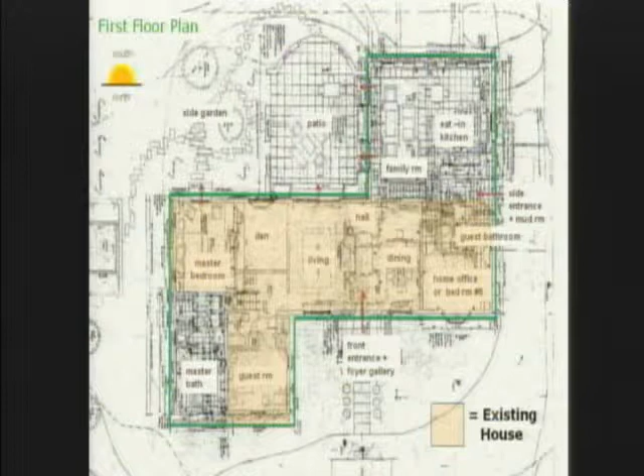When it comes to the floor plan, the tan area is the existing, and then the bump outs to fill the corner for the master bath, and then the larger family room and eat-in kitchen are on the back side, facing south, right? That was an interesting consideration, to say the least. When it comes to upstairs, it's a cape, basically. So you have bedrooms and bathrooms and lofts and offices for the home use all throughout the property. And we'll take a look through the back.

Even using the old flagstone from the existing patio, instead of letting the cracked and chipped ones go to waste, buying the diamond bit blade and chopping them up to use as stepping stones. Everything was about salvage and reuse as well as high-tech efficiency.

Inside, what you end up having is an open floor plan with the family room and the kitchen, and it's really about meeting some of the needs from the client that happened to be my wife to make it something that was also party-friendly. This is the house when the Obama team asked to host the Clean Tech for Obama fundraiser back in October. I said, sure, and it turns out about 6 months later on Earth Day, I had the invitation to teach his daughter and then her second grade class the conservation program for the school. So it's nice when the administration gets on board with generally the trends that seem to make a lot of sense.

Inside, again, you wouldn't necessarily see that this was a radiant floor system, but the idea of thermal mass and having 1.25 inches of gypcrete below the tile means there's about 14,000 pounds of masonry in this house, and it holds the heat. So even when the sun goes down in the winter, now there's an opportunity, not unlike the way a sponge holds water, to start to release that heat back out. All those things start to combine with the zero VOC paint, the Energy Star appliances, the low-flow faucets, collectively aggregating all those savings.

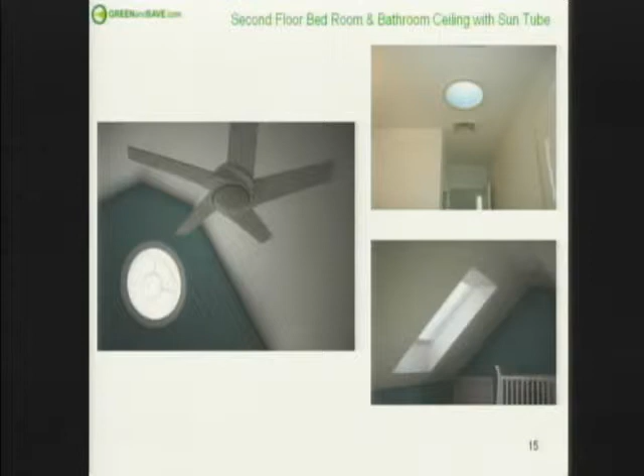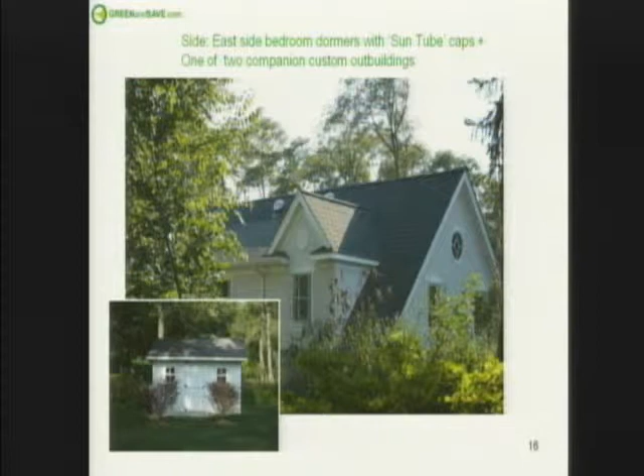When it comes to sun tunnels and skylights and 5-speed reversible ceiling fans, we really went to every length to think of what could be done to create efficiencies. Those little sort of domes on the side of the house, they're actually the caps to the sun tunnels. If anyone's interested, we have at Green and Save all the data about the payback and the performance. But for a few $100s, you basically get light for the next 5 decades. And it's one of those things where if the room is right, it really makes sense to look for things that maybe we didn't grow up with in our own houses.

Inside, from the crazy wallpaper to the shot on the right with the light coming through the door, even translucent panels, inset and doors, provide an opportunity to share light, which means you can walk into rooms and you don't necessarily always have to turn the lights on. It's not unlike the spirit of those sun tunnels.

When it comes to the bathroom, even having the floor run with the radiant heat in the shower, so with various thermostatic temperature gauges that speak to the basement solar tank, we're now priming the shower, and it's warm on the floor in the morning at about 6:45.

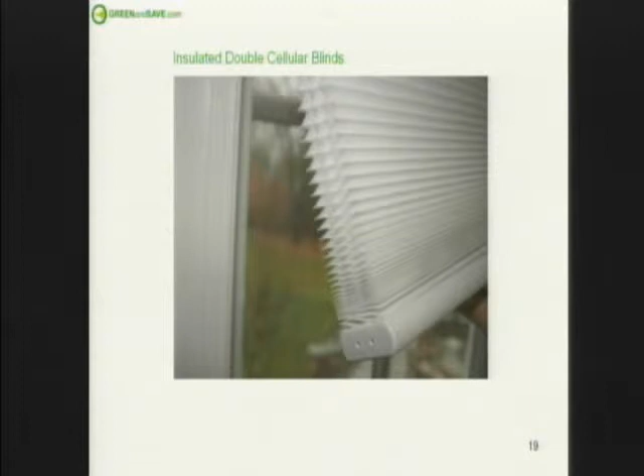Insulated double cellular blinds, the low tech that seems pretty obvious. Well, the air is trapped inside those cavities versus just a mini blind. The opposite would be a higher cost when you come to a curtain system instead of a rod, which lets the air circulate behind it. Now by running a cap on the top and letting the drapes touch the floor when they're closed, all of a sudden we're getting some incredible thermal advantage, and we found a NASA-like fiber that basically traps air, which is stitched inside those curtains. Well, knowing where you live in the house is pretty interesting. We shut those curtains in the summer during the day, but in the winter, since it's on the south side, we will leave them open.

So the way it works, we're going to start opening certain things and closing them based on where we are on the planet. I always joke with my 4-year-old, because he has a compass, that a tool like this, as simple as it is, is so incredibly important. I've seen realtors that might talk about a sunroom in a house, but in fact it's on like the northwest corner. They're not getting a lot of sun.

So when we do home efficiency checkups and we do a lot of the reporting, coaching homeowners into how to operate their home as an organism, not just an object, is part of the rhythm of our methodology. Even a stair, it's basically ACL Industries up in Stamford, Connecticut that built it. They built the USS Roosevelt. It's made from about 600 cases of recycled aluminum beer cans. Everything that we did down to the sisal rug and the bamboo floor was about looking at sustainability as well as energy.

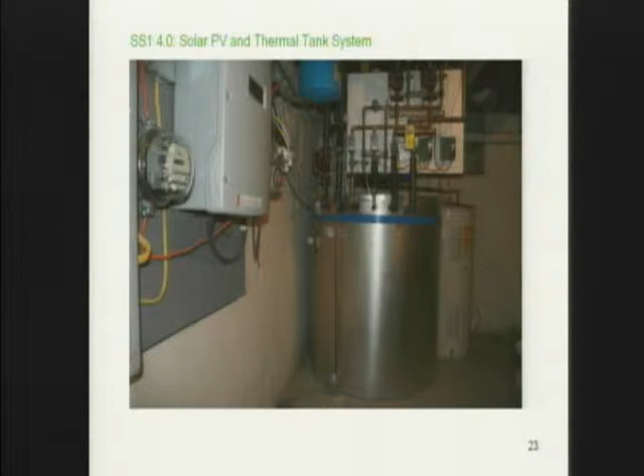This actually was featured on the cover of Inventor's Digest magazine, not to be confused with Investor's Digest, which has slightly more readers. But that was a nice, I think, moment in family history to at least get to that level.

When it comes to questions, we find that people always ask about the payback. You know, when am I going to get my money back from all these green initiatives? And with reducing utility bills, that's becoming more and more important. What I did is broke this down, where there are hundreds of examples, but picked 5 tactics just to speak to this evening. One is the shower head. This is a pretty incredible statistic. A $40 high-efficiency shower head can save more money than about $4,000 of solar panels or new windows.

We simply don't meter our hot water tanks. We have no idea that it can run from $200 and $300 up to $400 and $500 a year. So it's really hard to make electricity from the sun. You have to spend about 40 grand to generate maybe $1,000 of electricity. Now, tax credits and all the incentives help. We created actually a decoder, where we read the 400-page Recovery Act and shrunk it down to about a dozen pages to help people. But even after the tax incentives, you're still spending some pretty big money to get the solar panels. So a lot of these smaller, seemingly obvious initiatives go a long way.

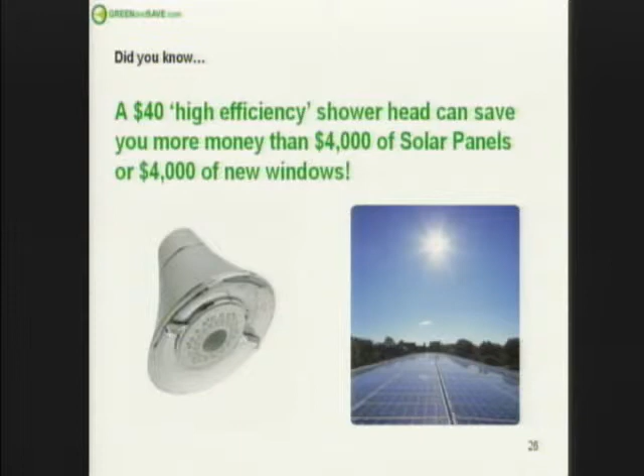What's really funny is they called these low-flow shower heads for years. And the reality is it's the worst name you could ever think of. We've now done some consulting with companies, and we call them high performance and high efficiency and amplifying shower heads, something that's got a little gusto behind it. And they're actually designed in several different forms, not unlike a traditional shower head. This one on the screen happens to be approved by my mother-in-law, who was happy to see that the high tech was working to her advantage.

Amazing statistics about programmable thermostats. I mean, really obvious stuff. When we go in and meet with homeowners, we're often coaching them on just how to program it. 70% of the thermostats that have programmability are not programmed by American citizens. Like, here's this great piece of technology.

Imagine the millions of dollars in R&D behind it from companies like Honeywell that aren't being used. So when you're talking about payback, even the most expensive ones that can run up to $110 or $115 can save you between $100 and $180 a year. Well, where in the stock market are you going to see a return like that?

I mean, it's about education at the fundamental level. We never got a manual when we got the keys to run a lot of these houses. They make you take a test when you get a car and driver's license, not for the house. So part of this is just at a mass level. We're working with thousands of homeowners and really pushing the content across the web, nationwide.

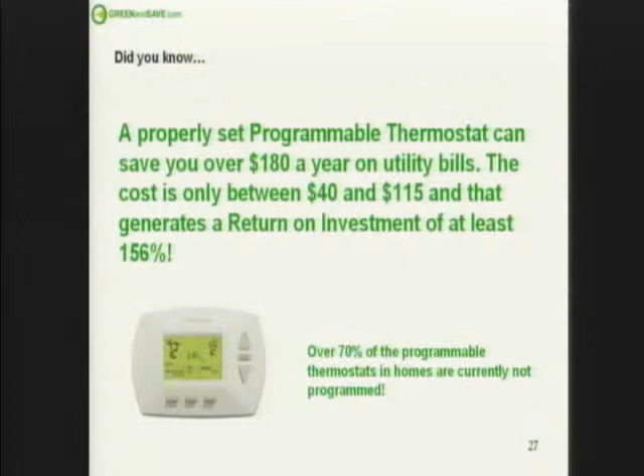Here's one of my favorites. The companies that make the window cleaner are basically delivering water. They're about 99% water, and we're really paying for the diesel fuel to transport it from the factory, and the diesel or the gasoline to go get it and move it to a Costco or buy it in our own cars. So what we found is a cleaning product that is a concentrate.

You can squeeze literally a couple drops into the bottle once you've used it and fill it up with your own tap water. The bottle of, call it a Windex, might be $2 or $3. Well, there are 4 of those in a gallon at 32 ounces. That's a $10 per gallon product, as opposed to a $6 product that will generate 32 gallons.

So when we have these conversations, we talk about efficiency for the home itself. We talk about the water, and we talk about the air quality and what's happening in the landscape. But we also talk about operating that home, doing things that might break the pattern. I never grew up in a household where mom or dad was mixing the soap with water from the tap. We got used to going to the grocery store, throwing it in the cart.

There's a whole industry that makes a fortune basically putting water in single-use containers. So it's interesting that part of this exercise is changing habits, breaking the inertia, and again, thinking of home as an organism, not just an object.

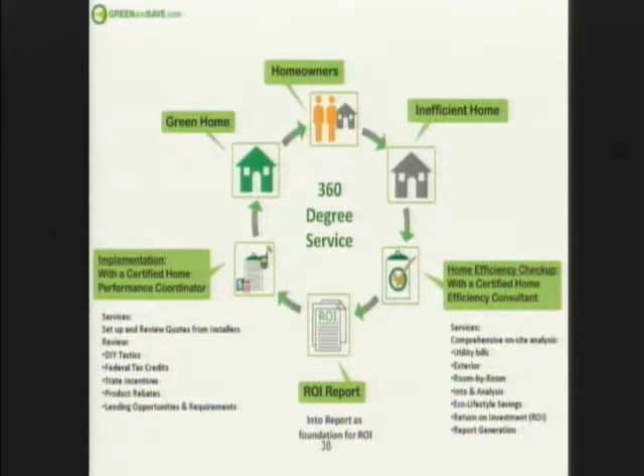It's not enough to know how overweight your child may be. You got to get them to a gym. We literally have a problem with overweight houses. The ROI report is the guide, but what we did find is many homeowners do not have the energy and the tenacity to go see it through. They need someone to hold their hand. And you're going to hear from some of the group this evening about how that can be executed. But this idea of performance coordination is a complement to a lot of the things that happen with traditional auditing.

When it comes to training, we are also involved with new job creation for home efficiency consultants. Back in the day, that would be before last summer, we talked more about the healthy planet. Well, now, if we can start by talking about job creation, and that leads to energy savings for homes and buildings, and it leads to higher home values, now we have a conversation with a much broader group. The byproduct of that savings can be the healthy home and can be the healthy planet if we do it correctly.

With seeing and believing, showing people where they spend their energy, what the use of electricity and fuel and water looks like is not unlike the blood work that a doctor sees in order to make recommendations.

When it comes to home efficiency, we found that there's a certain sector of the culture that does not have the interest in digging deep and spending what could be $300, $400, or $500 to have someone come to their home. So for $15, we can give them the tip of the iceberg, access to all of the data, home heating indexes for their house by literally entering in something as simple as utility bills, base load electric, base water consumption, and then through the software and the things that we've developed, they're now given the recommendations with those ROI calculations.

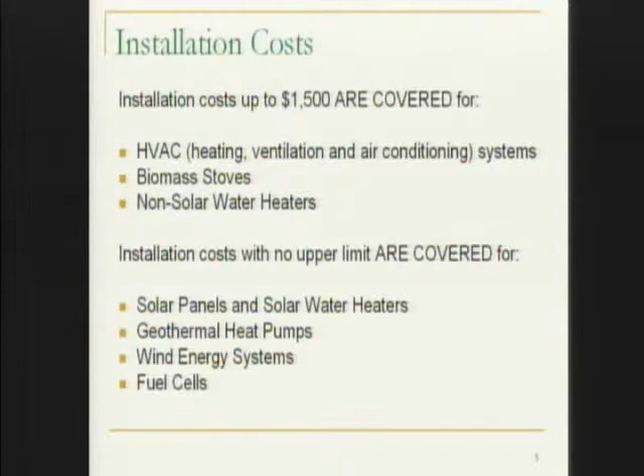For the next page, I have installation costs. These kinds of projects are covered in terms of having your installation costs paid for. These types of projects, replacement windows, replacement doors, blown-in insulation, new roofing, shingles, these only cover the materials and do not cover the installation costs.

I highly recommend just Googling Energy Star tax credits. The first page that comes up is a very helpful page, and it explains all the different ratings that your equipment needs to get in order to qualify.

Pennsylvania tax credits. In bold, I have Alternative Energy Production Tax Credit. I believe that's the name of this program. What you should do is Google that in order to get into Pennsylvania's webpage to find a little bit more information. This tax credit may be available for 15% of the cost of your project through 2016, for existing homes only. Now, the budget is up in the air, but from what I understand, I believe that this program is not necessarily on the chopping block, but don't hold me to that. You have to be a Pennsylvania taxpayer, obviously, to be eligible. It includes solar projects, wind and hydro projects, geothermal.

Now these tax credits, if you're familiar with a tax credit, it's essentially the same as cash. I mean, it's real money. This is not a tax deduction, this is a tax credit. And if you have the tax basis, you can use it all in your first year. If you don't have the tax basis to use, you can spread it out over 5 years, so you can carry it forward. Oh yeah, the bottom one is important.

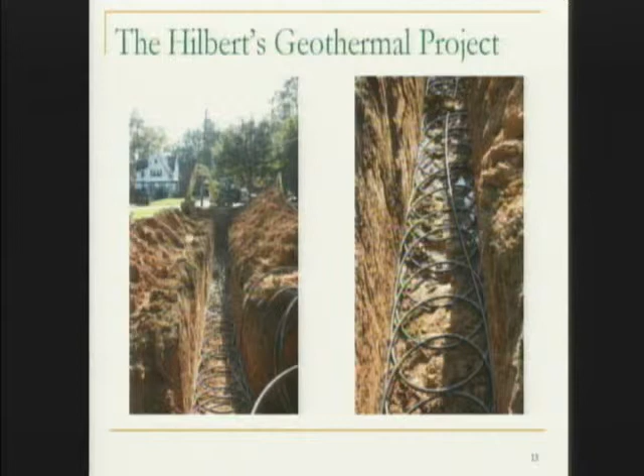A couple quick pictures for you. That's my front yard being destroyed, and that's what's called a horizontal ground loop geothermal system. The trenches have pipe at the bottom of them—there are 5 trenches you can see on the left, connected together in a header. At the bottom of the trench is plastic pipe carrying my geothermal fluid through it. On the right, you can see them putting my geothermal system together and filling the loops up with antifreeze.

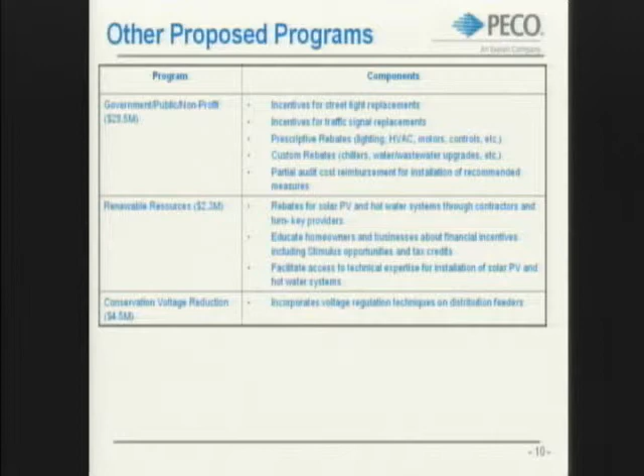And then actually this is listed twice. The Renewable Resource Program is actually a program that applies both to C&I customers, the commercial industrial customers, and residentials. And then finally, there's a conservation voltage reduction program. This was interesting, and it would actually allow PECO to tune its distribution system so that there's a better, efficient use by all of us. Very interesting that we have out there as well. So that's just real quick to summarize the 18 programs that are out there.

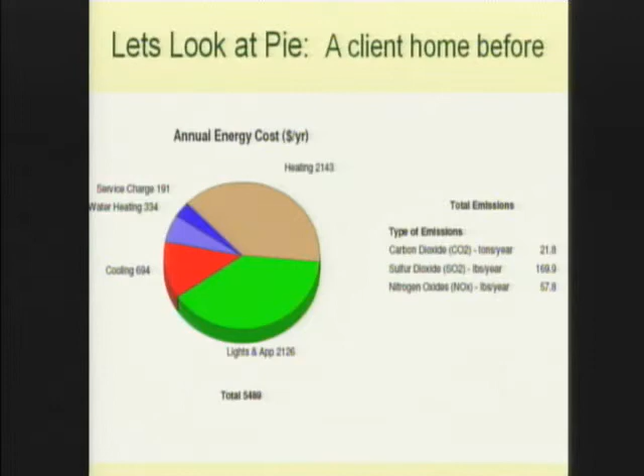Use renewables or high efficiency for HVAC and hot water. And these choices all get related to that $130,000 in a second here. Use renewables to produce power and reduce your needs. Since it's supper time, let's talk about a piece of pie. This is Brian's pie, that $5,489 a year. This is how he spends his energy. He also puts out 21.8 tons of carbon dioxide into the air every year just for his home. Never mind the Yukon in the driveway.

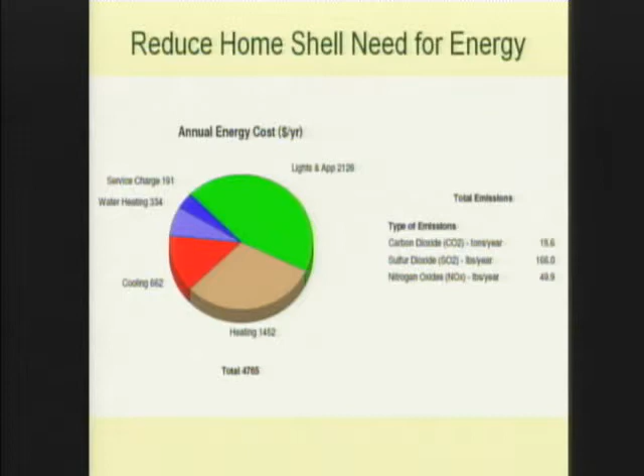We reduced the home shell need for energy modestly, $700 a year, not a real big energy undertaking, but he's dropped 3 tons of weight. Charlie was talking about our houses being overweight. Then we took him on a lighting and appliance diet. We chucked that old top load washer. We got him a high efficiency washer. We got him an Energy Star 2010 refrigerator in the plan. He's got some LED lighting and some CFL lighting, and he's really psyched. He really wants to do this.

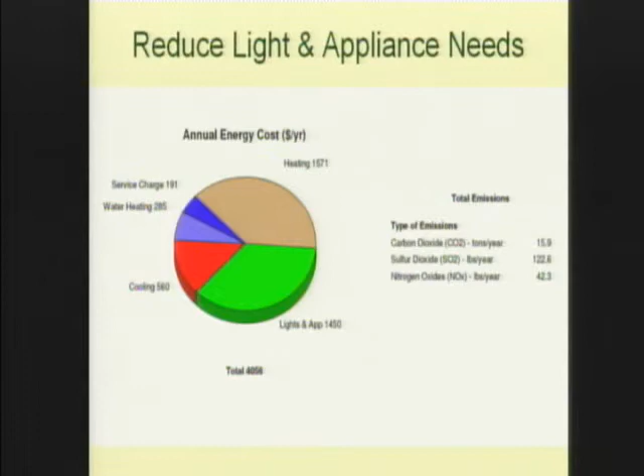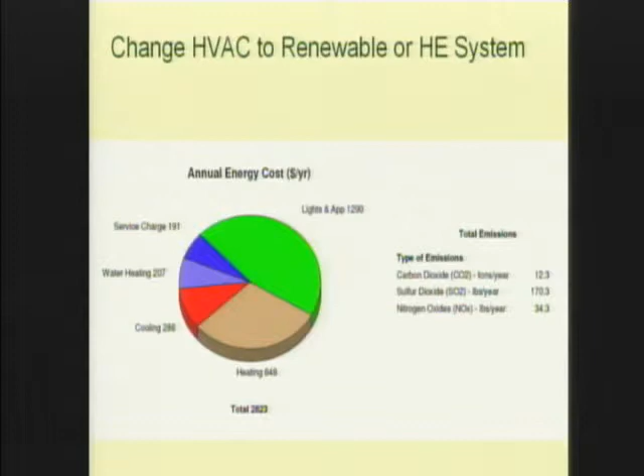And if you look at his lighting and appliance bill, that's a really modest reduction. It was $2,100. We took him down to $1,450. Mine, by contrast, for the year is about what he pays for a month. Annual cost after a dual fuel heat pump was installed. We offered him the opportunity to go with solar heating, and he decided that he wanted a little bit more of that $130,000 than Pico was getting. And we'll show you how and why.

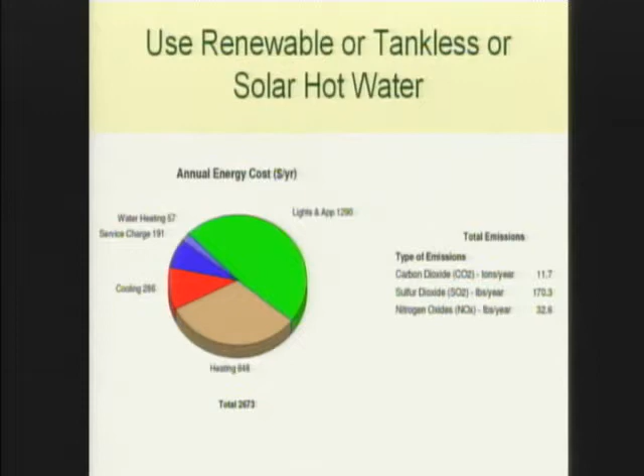Then we stuck him with either a tankless or a solar hot water, which is usually the next choice for a client, and it got him down to $2,673 from his $5,489. Well, how low can he go? Let's see. Actually, it's so low that it no longer is pie because it has a negative in it, and REM/Rate spits out. We got Brian down 15.8 tons of carbon a year, and we got him down to $1,253 a year from a $5,400 bill, but that's really a lie. His bill was really $6,800, and all of this took place after we took $1,400 off of his bill by putting solar hot water heating on his pool.

$70,200 after the solar tax credit. You keep on going down the line. $48,550. That's better than a good day shopping at Sims. So you know he got a heck of a discount here. He got $87,000 worth of stuff for $48,550. Not a bad deal. Let's look at the ROI.